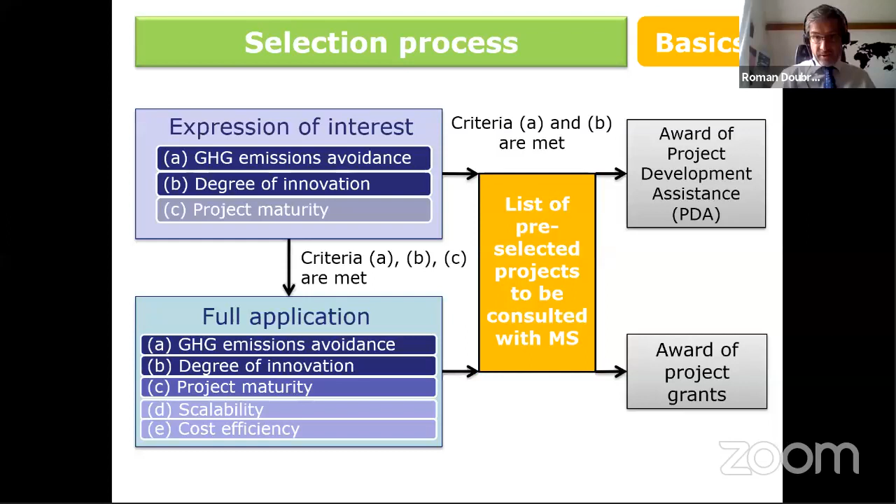Another element that I think is important, and makes this different from other programs, is that we were really thinking about how to simplify the way the funds will be paid out, so that we are as close as possible to the normal business of companies and their normal investment decisions.

The Innovation Fund support will be paid along the project milestones, as we call them. We have two milestones that are obligatory: financial close and entry into operation. But project promoters will be able to suggest additional milestones as they go along with their own project, and the funds will be disbursed once these milestones are met. So these will be lump sum payments.

We will not be checking, like in other programs, the full costs. What is important for the Innovation Fund is that the milestones proposed by the project are met and the project progresses. 40% of our support is not related to the achieved greenhouse gas emissions - this is also part of the risk that the Innovation Fund takes on its shoulders and puts on the table.

The first 40% of funding can be disbursed upon or before financial close, to enable the development stages of the project. The remaining 60% of the support has to be related to the avoided greenhouse gas emissions, but this will be paid out along the project's evolution during construction and once the project enters into operation. Thank you.

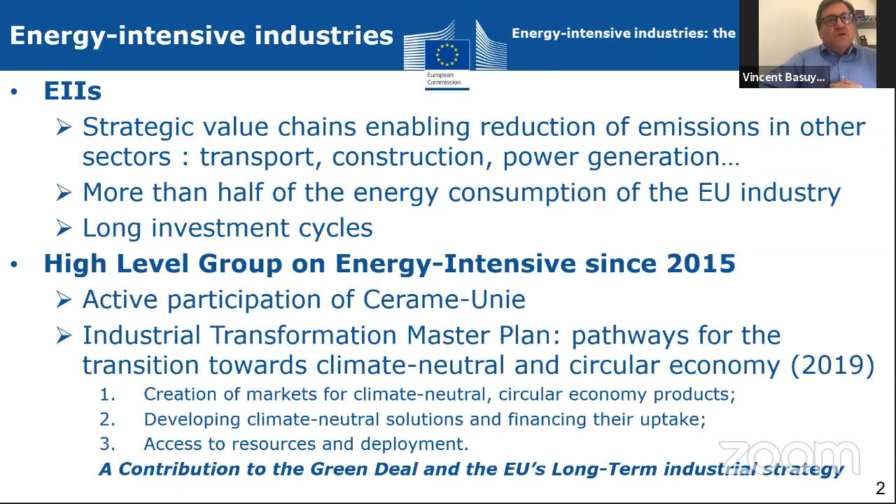I won't go into detail on this master plan, but I'd like to present some key recommendations from the High-Level Group found in it. First, the creation of markets, as mentioned, requires a life cycle approach and proper measurement of the greenhouse gas footprint of products and materials. We have also enhanced the use of public procurement to select sustainable products and services.

In terms of innovation, my colleague presented the Innovation Fund, so it's important by 2025-2030 to develop large-scale pilots to showcase clean technologies for energy-intensive industries, and to align eligibility criteria between different funds at EU and national level for interoperability of funding mechanisms. Investments are key in this transformation, so it's important to build a pipeline of technology projects to be funded by both public funds and the private sector, facilitating access to private capital at affordable cost, including through de-risking instruments.

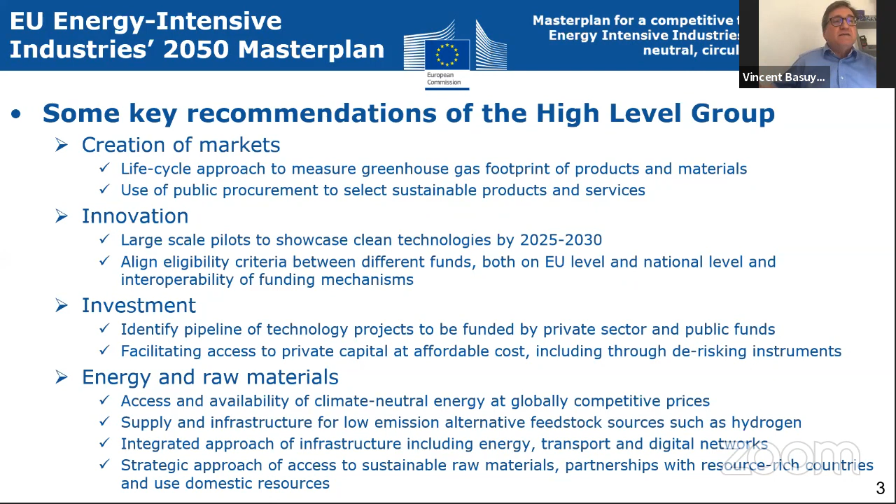I'll also mention energy and raw materials, which are essential for energy-intensive industries. We need to guarantee access and availability of climate neutral energy at globally competitive prices. We see solutions such as electrification or the deployment of hydrogen, but these are only possible if supplied at a competitive price. That means we need to develop infrastructure for low-emission alternative feedstock sources such as hydrogen. An integrated approach to infrastructure, including energy, transport, and digital networks, will be part of the solution. Regarding raw materials, as mentioned by the previous MEP, we need a strategic approach to accessing sustainable raw materials through partnerships with resource-rich countries and better use of domestic resources.

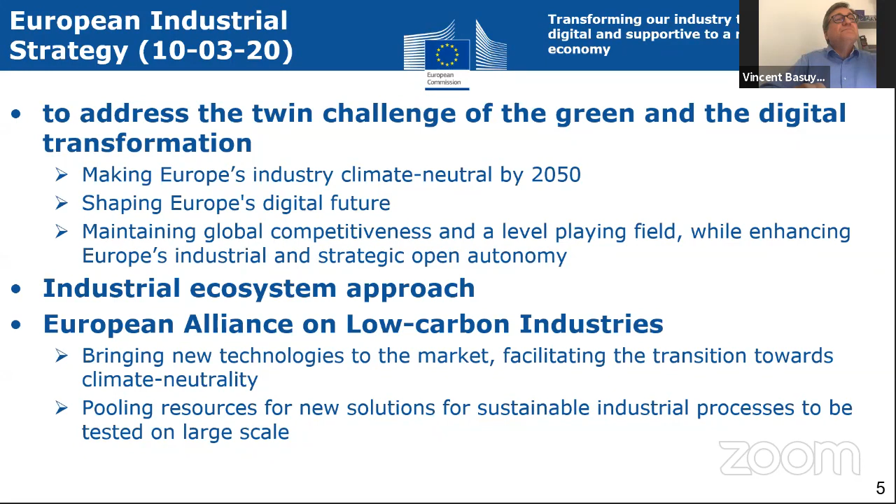Everything was fine, but as all of us have experienced, last March we experienced this coronavirus crisis, and that means we have to adjust the policy tools. On the 27th of May, the Commission proposed a recovery plan based on different tools in order to strengthen and restart the industry and the economy, and accelerate the green and digital transformation to strengthen the resilience of our industries. It's based on different tools—I won't go into detail, most of you know them, and it's still in development in terms of implementation. I'll just mention the very important role of relevant national authorities in being able to benefit from the funding available under the Recovery and Resilience Facility for the twin green and digital transition.

So I will conclude with these recommendations: the Commission's strategic policy framework—the European Green Deal, the digital and March industry package, and the recovery plan—are now the common policy tools for this strategic framework. The question is the implementation of these initiatives, which requires partnership. For that, we need joint commitment and cooperation between all EU institutions, industries, member states, and also European regions. Thank you.

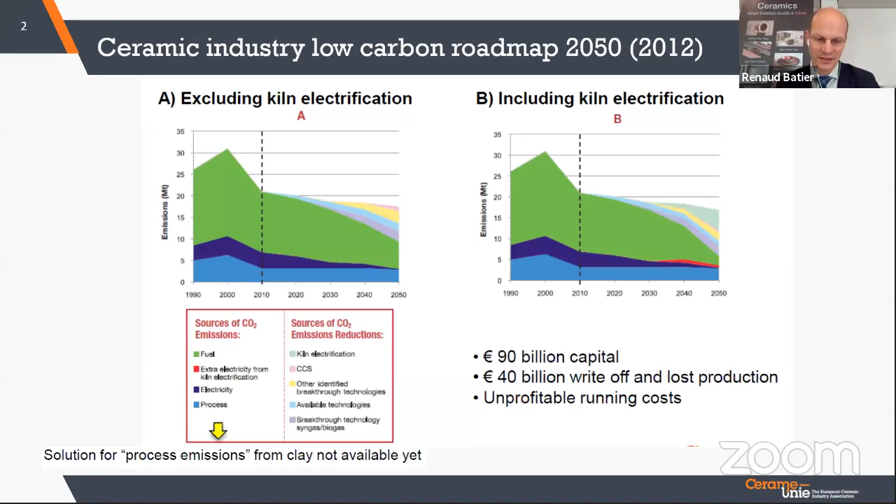So now we are moving into a different context where the EU has adopted a new goal, which is to reach carbon neutrality in 2050. We are updating our roadmap. We are in this process.

The roadmap in 2012 identified technologies to improve raw materials, so reducing emissions at the phase of raw materials production, energy efficiency, process optimization, kiln designs, and so on. It included cogeneration as well, which for us is a very adapted or very fitted technology because it works very well for us to produce both electricity and heat.

The problem is that if we use cogeneration, then we use a bit more natural gas, and ETS is making us pay more carbon for this.

In the context of this new EU objective, what we are trying to do is look at the technologies which we did not take into account at the time. So mainly substitution of natural gas with...

Renewable sources, for example. We think that the future will really be into hybrid technologies, mixing natural gas with, of course, hydrogen to some extent, and this is being investigated in detail. Also mixing natural gas and microwave, and using industrial heat pumps. So all this is being investigated, as we will see.

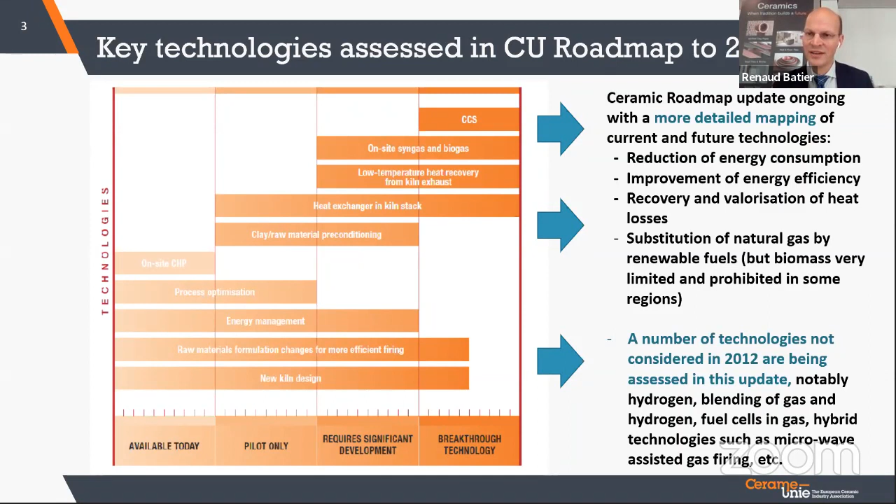I think the research and innovation projects that we will see later really show to what extent the new technologies that I already mentioned are what we want to investigate further: more efficient energy recovery with industrial heat pumps, hybridizing systems, considering cogeneration, and having the right incentives for cogeneration.

So these different technologies will be adapted to different contexts at national level. As I said, we have plenty of different subsectors. We are very heterogeneous, so we need absolutely all solutions. This is really the spirit in which we are engaged.

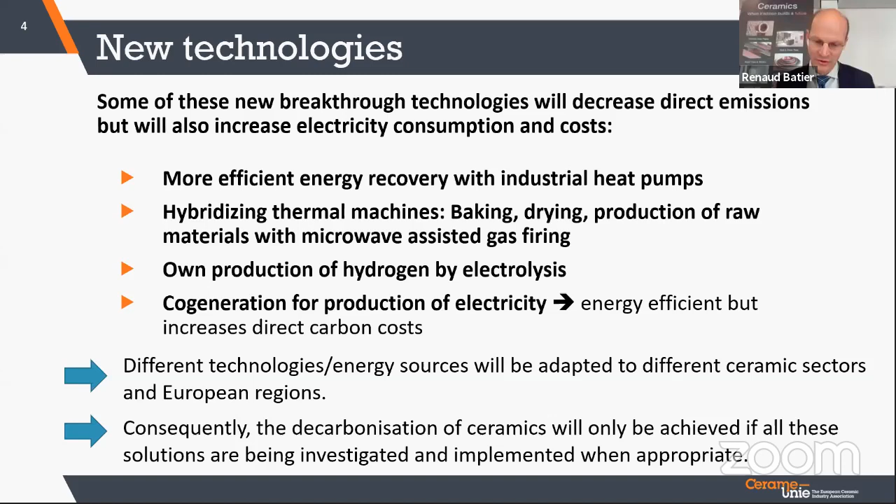So moving to the following slide, I hope I'm in time.

Concerning the other part, we need to be engaged, our members need to be engaged, we need the support of the ETS Innovation Fund and Horizon Europe, public-private partnerships such as SPIRE, which will then become Processes4Planet, where in the past we had 10% of the projects involving one ceramic partner, so it has worked for us.

But we also need recognition of the exposure of ceramics to these indirect costs, so direct and indirect carbon costs. Here we're speaking more specifically about the inclusion of ceramic tiles in the list of sectors eligible for compensation costs under the ETS state aid guidelines, because we are recognized as gas intensive, but we think EU regulators do not sufficiently take into account that we are going to become more electro-intensive. We need all these solutions, we need to invest so much in them, and we need the incentives.

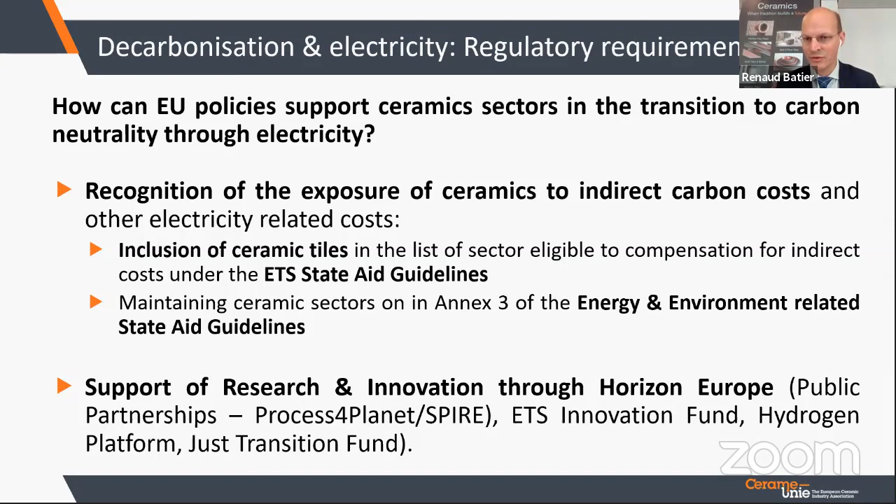And then after the ETS state aid guideline, the review of the energy and environment state aid guidelines will come. All our sectors are currently on Annex 3, the list of eligible sectors, and we need to stay on this list if regulators want us to invest in these technologies.

The fundamental problem we've had in this context is that legislations like the ETS are really made for large industries, for large emitters. We are a large industry in turnover, and we are very large in jobs, 200,000 direct jobs, but with all our SMEs, it's very difficult to fit the criteria that are often defined. The criteria to identify who is exposed to direct and indirect carbon leakage, the risk of relocation, are really made for large industries, not like us.

You can see here we have made an infographic. On the left-hand side is the current method, simplified, but this is the idea: we are currently assessing intensity by dividing CO2 by profits plus labor cost. This means that the more jobs you have for the same turnover, the less carbon intensive you seem to be.

For us, it's completely wrong to compare CO2 by the number of jobs and the number of people working in your industry. We think the right method would rather be, as you can see on the right-hand side, comparing CO2 with profits, and that really shows you to what extent you can pass through the carbon cost or not. It has nothing to do with labor cost.

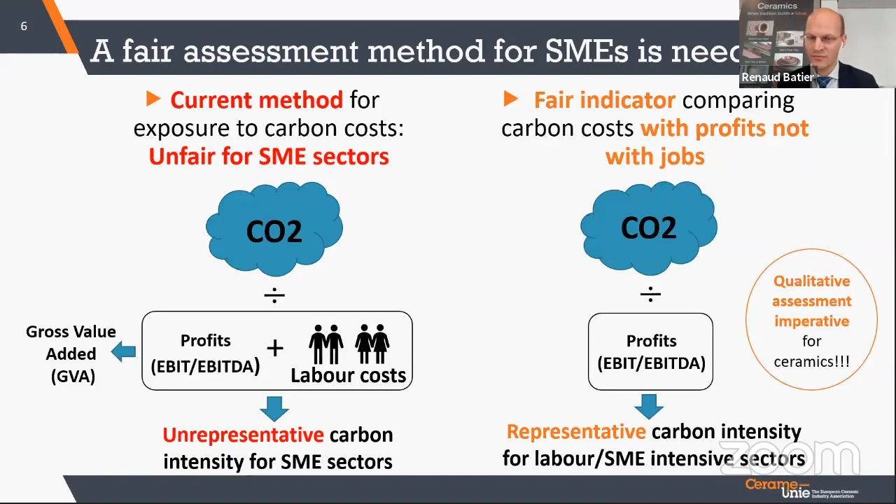And I will finish with one last slide, made by our consultants PricewaterhouseCoopers for the reply to the consultation on the ETS state aid guidelines. It shows that for ceramic tiles, the percentage of labor cost would be even higher for bricks and roof tiles.

But it's showing that for ceramic tiles, within the gross value added, which includes both labor cost and profits, our labor costs represent 15% of this gross value added.

For other sectors it's less, and we compete particularly with refined petroleum, because with refined petroleum you can make carpet, vinyl tiles, plastic tiles, and linoleum. So we compete directly with these, and the methodology applies completely differently to them, because their labor costs represent only 2% of their GVA.

So I finished on this, and I'm happy to answer any question at the end. Thank you. Thank you so much, Renaud.

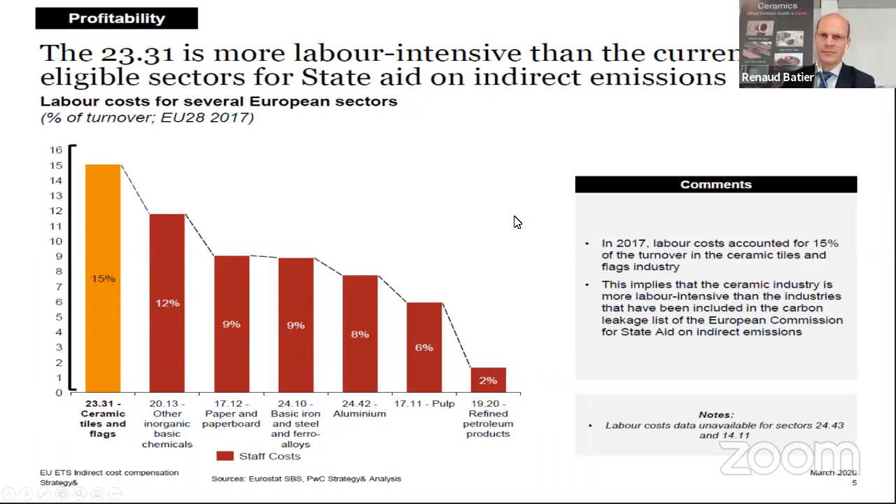If I look back over the speakers we've had this morning, we're hearing a lot of challenges: that the Just Transition Fund and the Green Deal are not enough, maybe billions of euros not enough, and that it's challenging for a sector with many SMEs to make these transitions, especially in the aftermath of the Corona lockdown. We'll come to all of this later in the Q&A.

I just wanted to sum up a little bit. What I did hear though was that there is a political will and a lot of enthusiasm to make these changes. So that's really positive.

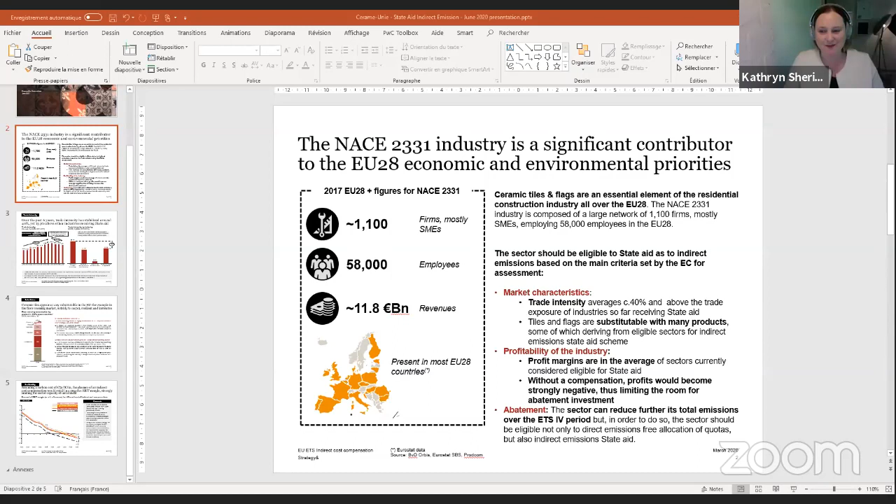And it leads us nicely to our next speaker, Vladislava Iovkova. She's a director at PricewaterhouseCoopers, PwC Advisory, and she's going to talk about the economic aspects of decarbonization. We've heard about many challenges. We're going to hear some solutions in a moment, but first let's look at the economic aspects. Over to you, Vladislava. Thank you.

Good morning everyone, I'm Vladislava from PwC, and I'm pleased to be with you here today. We've been working with Cerame-Unie for some years now, assessing the impact of EU ETS. And today I will speak to you about indirect emissions and state aid compensation.

That's a topic that was already introduced in the previous presentation. Today I'll give you some key facts, some highlights on the economics. Namely, I'll explain why the roadmap that was nicely presented by Renaud is very important for this industry.

A lot of things are going on. However, the economics of the sector also has to be considered, with a key question introduced throughout this session, throughout the morning: how to make it possible and how to ensure that there is indeed an even playing field for the sector.

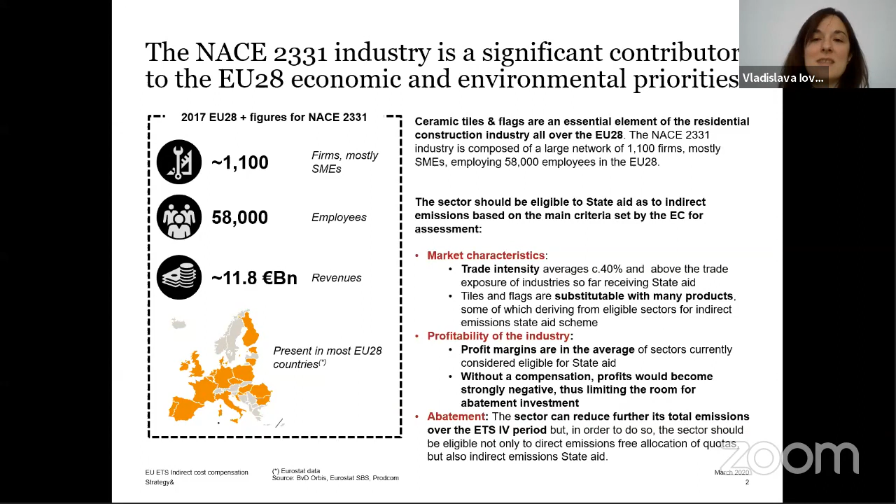Let me start with some key facts about the ceramic tiles and flags industry. This is an industry composed mostly of small and medium enterprises across Europe, employing over 58,000 employees based on Eurostat data. This industry is present in most European countries, really hugely widespread across Europe.

As you might know, the eligibility for the state aid scheme to compensate for indirect emissions is based on a few criteria, which consider not only the ability to invest and curb emissions, but also some market characteristics, as well as the profitability of the industry. Today I will develop mainly on these two points, to give you the other side of the criteria, the other side of the challenges the sector is facing today.

Our first point, already introduced at the beginning, is trade. As you know, ceramic tiles are highly traded worldwide. Today, the sector averages a very high trade intensity. So what is trade intensity?

It is the ratio between the import-exports of the industry with respect to the extra-European countries, and also the production plus imports. So it's a measure of the trade dynamics, and it's a main criteria the Commission is considering to assess whether an industry is eligible for state aid compensation.

So in the context of this industry, trade intensity is quite high. It's been historically high. And today we see that comparable industries who, as of today, have been receiving the state aid, somehow do not have the same trade intensity as ceramic tiles.

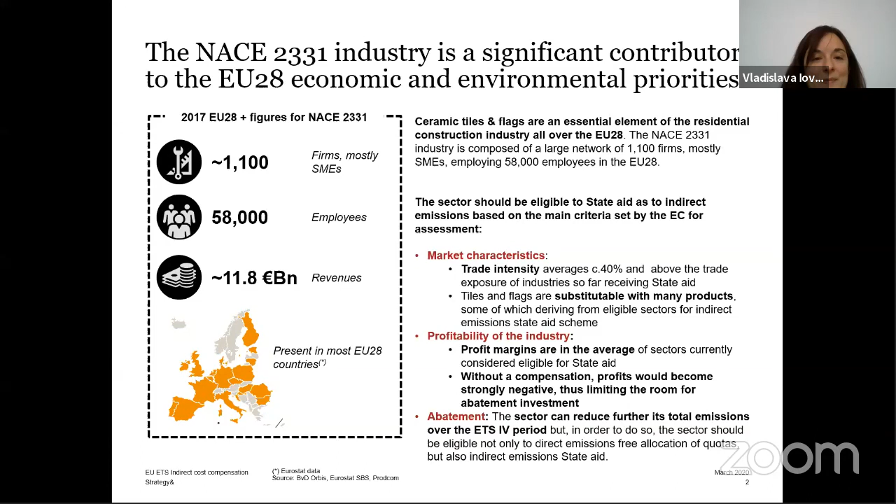So for the first point, I'll show you briefly the figures of trade intensity that I just introduced. Trade intensity for this industry has historically reached ratios above 30 and 40%, which is very, very high, also with respect to the criteria the Commission is studying.

And over the last year, if this ratio managed to stabilize, this can be explained by anti-dumping duties which were imposed, and also what is being considered today for Saudi Arabia, for instance.

And if we consider other sectors which, as of today, are granted or receive state aid compensation for indirect emissions, we can see that ceramic tiles and flags, over the historical period considered for assessment, has higher trade intensity. This means the sector is already more exposed to these competition issues with third countries.

Regarding the internal market, as I introduced, ceramic tiles appear to be quite easy to substitute even internally. Here we propose an example regarding floor covering, one of the main markets for ceramic tiles, across a set of countries which account for more than 60% of the total market. And we show that in this major segment, ceramic tiles account for approximately one third of the market.

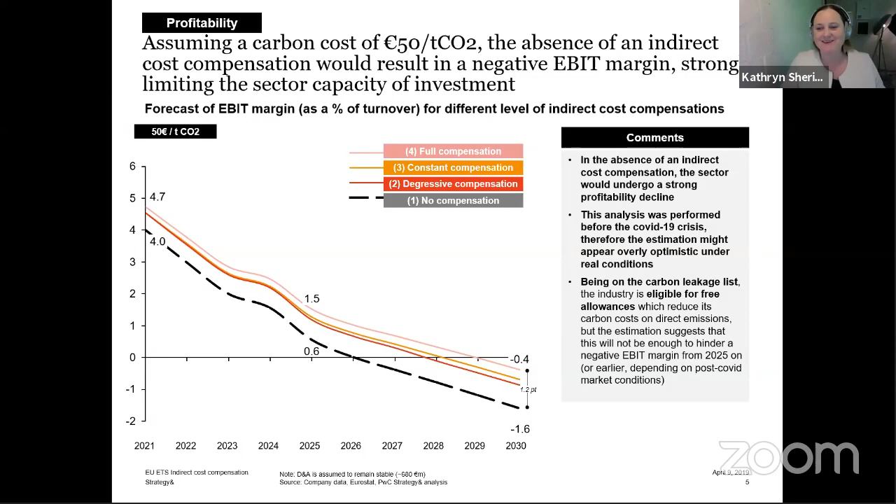As we switch to our next speaker, it does reflect something we see across the European Union: industry sectors where there are lots of SMEs and lots of jobs at stake, but we still need to make the change to a less carbon intensive industry. So it's a very important challenge, and we're lucky to have such informed speakers with us today.

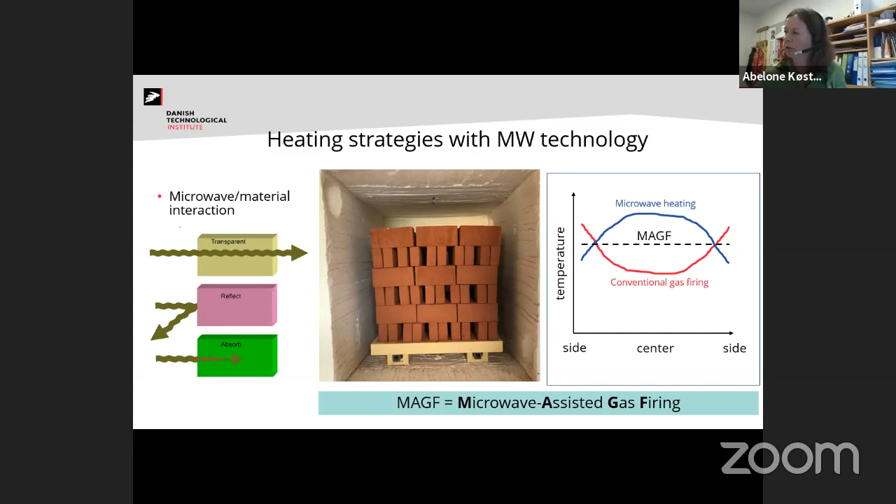In a recent project we built a pilot microwave-assisted gas firing kiln, as you see now. Its capacity is around 200 facade bricks, and it can fire up to 1300 degrees Celsius. It has 4 gas burners, so it can heat with gas alone, and it has 4 microwave ports and 2 microwave generators.

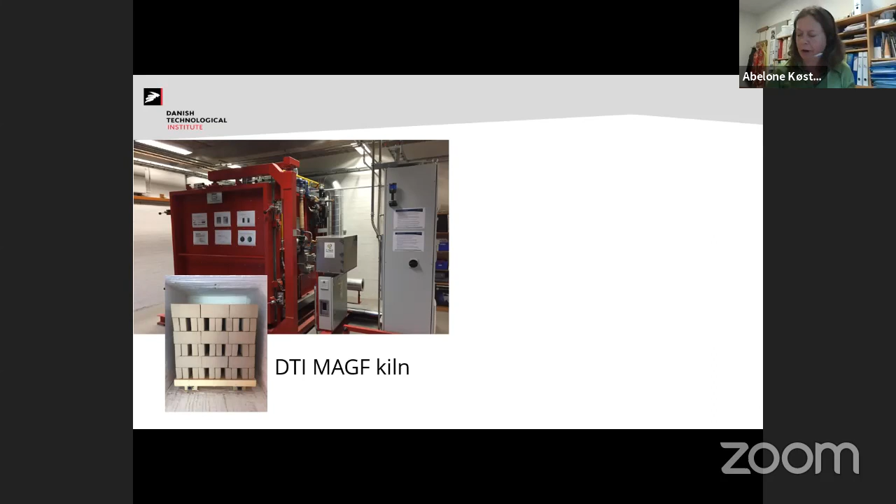We did a lot of firing with this kiln, trying conventional heating with gas and trying to heat as well as we could with the dense stack - stacked the same way as in the brickworks. Normally it would take us 24 hours to heat to the top temperature, and we would soak for 6 hours to get optimum quality.

But when we applied the microwaves, we could heat in nearly half the time, 12 hours, and we only needed a soaking time of 4 hours. So we could heat much faster and still obtain good quality bricks, both aesthetically and technically.

As far as energy consumption, we could see that we could almost halve the use of fossil fuel, because we transformed into electrical energy using the microwaves, and the total energy savings were 20% when we compared optimum gas firing with optimum microwave-assisted gas firing. This kind of savings we could not obtain in a standard tunnel kiln, because the energy saving is mainly due to the shorter firing time, giving less energy loss from the kiln itself. But still, we were able to transfer from gas to electrical energy.

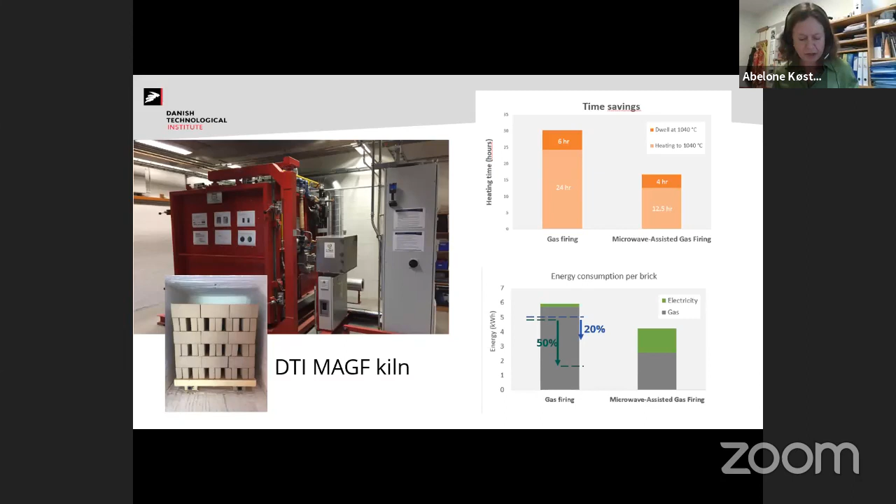So what were the benefits from this project?

We used at least 44% electric energy by applying microwaves. So this is the potential. We shortened the heating time by up to 50%. This would give you less heat loss from the kiln itself, and it would also allow higher productivity, a higher throughput from a kiln, or a shorter tunnel kiln if you like. But the shortcoming is, of course, we did not have an optimum kiln design.

We did this more or less based on experience. Instalat built a very good gas kiln, and our project partner, C-Tech Innovation from the UK, did the design of the microwave appliances. So we had a good design, but based on what we learned after literally hundreds of firings, we know now that we would have done something differently.

The main reason we were not able to supply more than nearly 50% microwave energy was because of the kiln design, which was based on controlling the heat with gas firing, so we could not go higher, simply because we could not control the kiln. So a large problem here, other than the use of a lot of expensive electricity, is scaling up the kiln design.

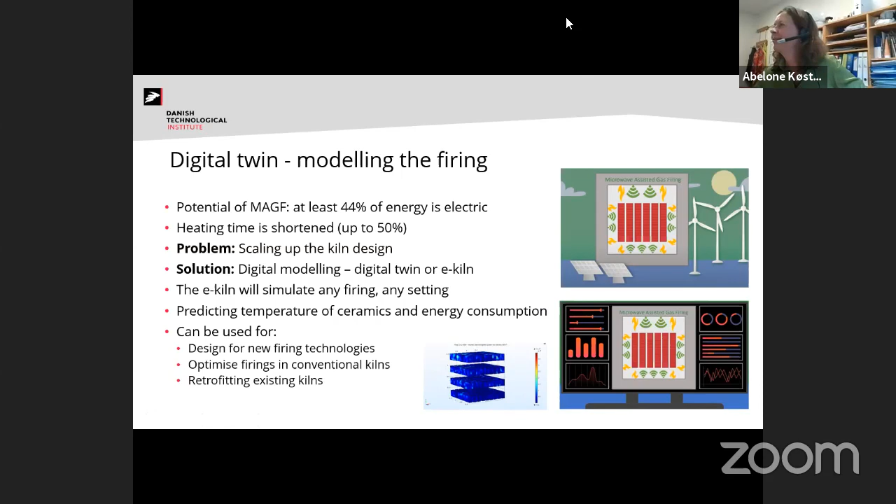Okay, thank you so much. That's super interesting. When you think of microwaves, you're not necessarily thinking of ceramic kilns. So that's super interesting. Thank you.

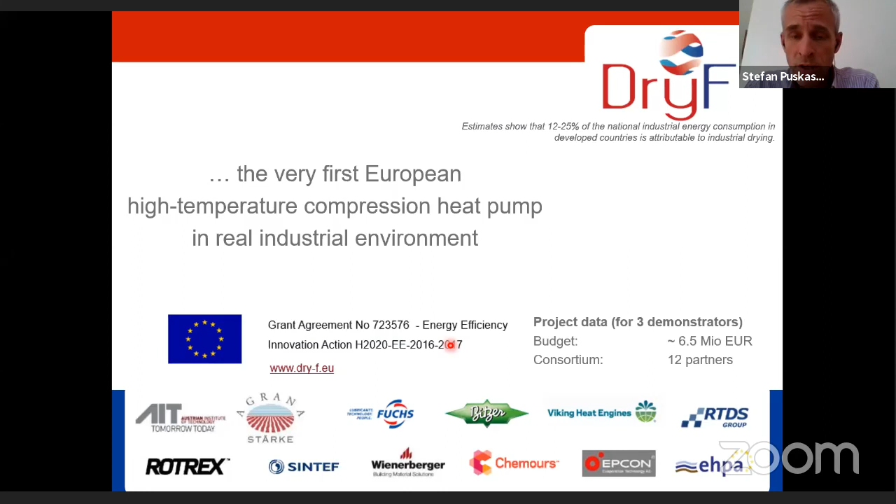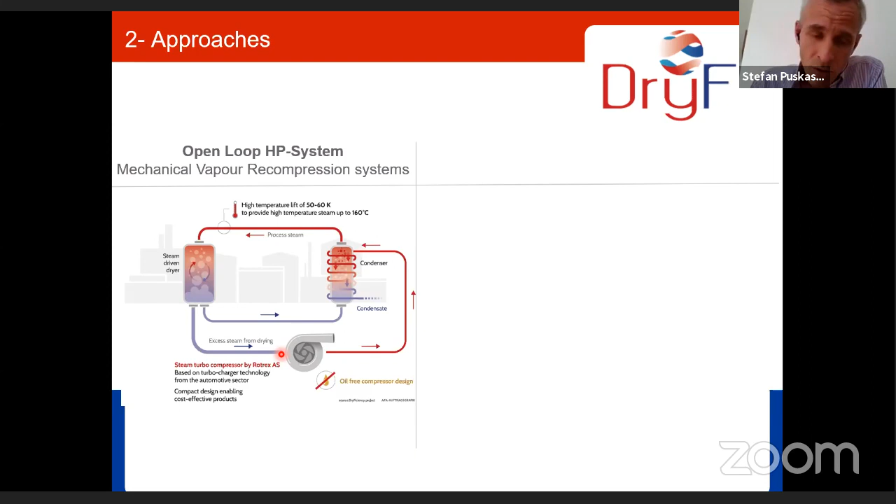We developed in this project 2 kinds of heat pump drying systems. One is an open loop system where the evaporated water is used as a refrigerant, becomes compressed with a turbocharger to condensate the evaporated water and recover the latent energy. This technology could also fit very well for brick drying, but anyhow, we are now in the second part of the project, the closed loop drying development.

Here it is about the compression heat pump that provides temperatures up to 160 degrees Celsius. The innovative things in this heat pump are the refrigerant coming from Chemours and the compressors. We have one screw compressor from Bitzer and piston compressors from Viking Heat Engines.

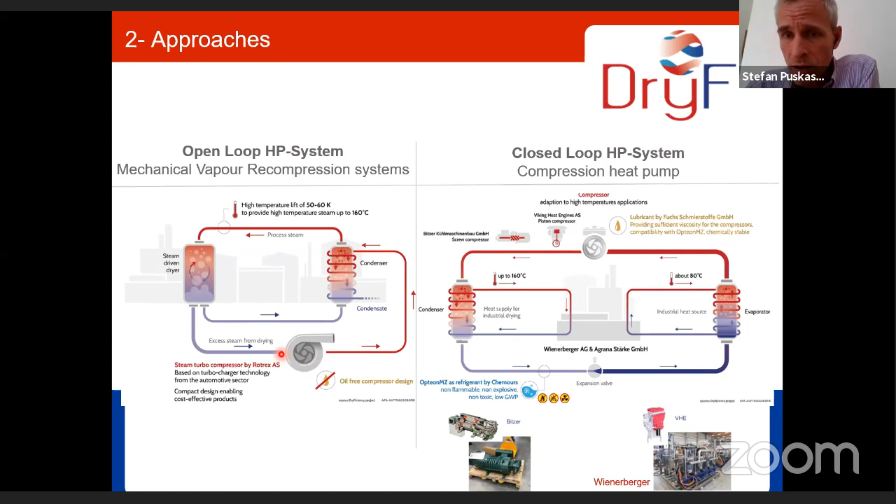The second application you find in the Wienerberger plant. The lubricant is also an issue in high temperature compression heat pumps, so we are working in a closed loop system and not in an open loop system.

The machine looks more like you see below. It has a heating capacity of design of 400 kilowatts. We have reached 250 kilowatts on the sink side, and maximum water temperature of 160 degrees Celsius. The electricity consumption is between 70 to 85 kilowatts.

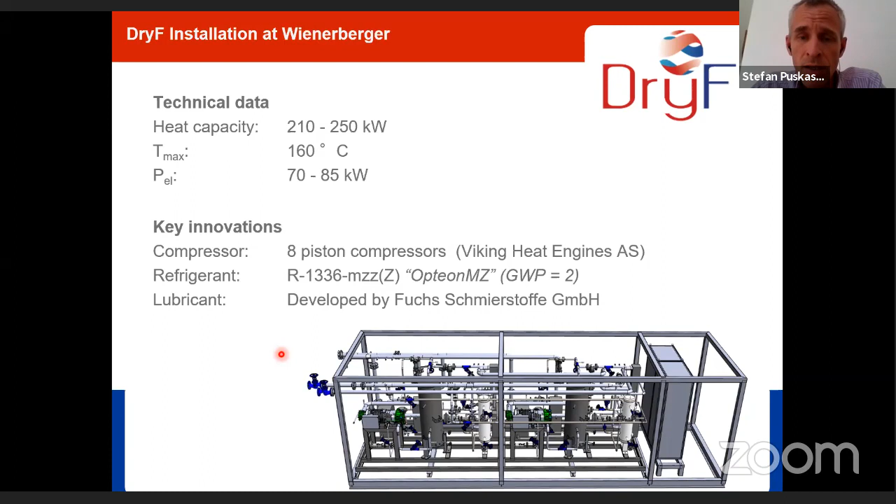I mentioned the piston compressors coming from Viking Heat Engines. The refrigerant is newly developed, it comes from Chemours and has a global warming potential of only 2. The lubricant is developed by Fuchs Schmierstoffe.

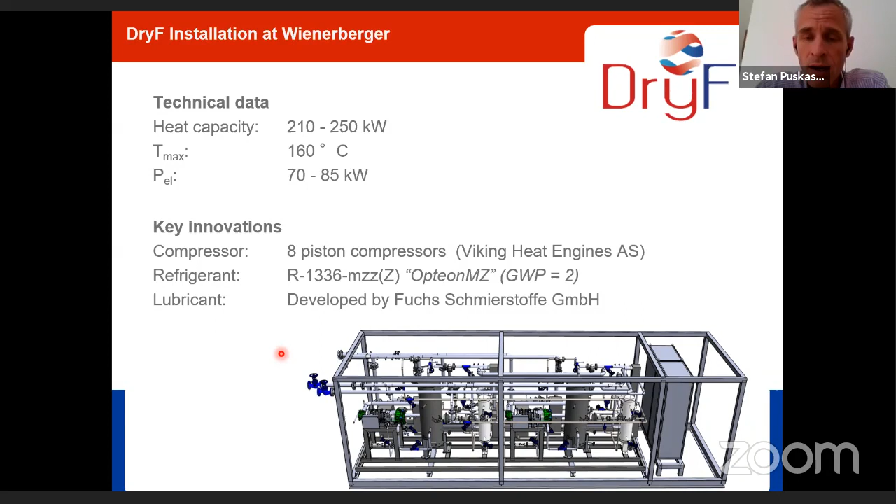Our role is the demonstration in an industrial environment of this new technology. All this is installed in Upper Austria in our so-called demo plant. This is a quite small hollow block production site where we try out all the new technologies, best available technologies, to figure out how to improve and reduce the specific energy consumption of existing production sites.

I think everybody's familiar with the production of bricks. There's the tunnel dryer and the kiln, and the excess heat from the cooling zone of the kiln is used to heat the dryer.

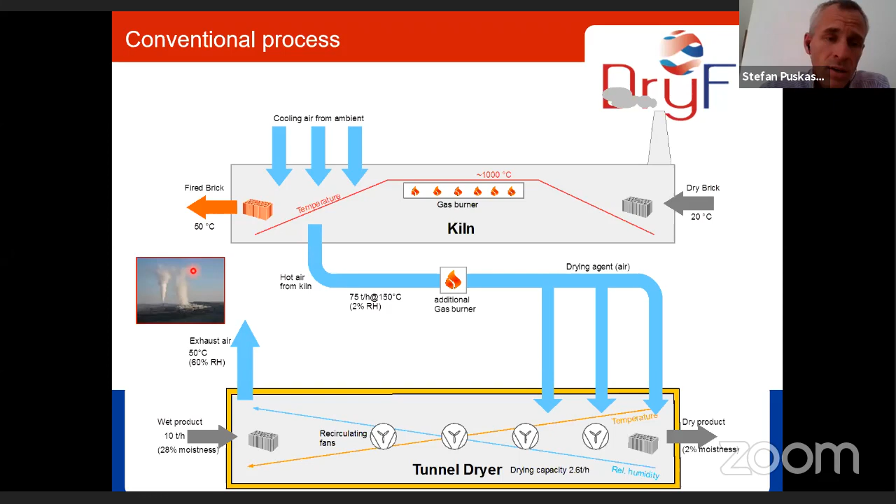Now have a look at the temperature profile and the relative humidity profile through the dryer, because in the next step it will look slightly different. The goal is to recover energy from the exhaust air of the dryer, and we do it like this.

We produce water of 90 degrees Celsius, and with this 90 degrees Celsius water we heat the tunnel dryer with internal heat exchangers. They were used, not centuries, but decades ago. It was normal that we had internal heat exchangers in dryers. Now we have to come back to this technology.

We take advantage of this 90 degrees Celsius water duct. We use it as a source of energy for the DryF system to demonstrate the reliability of this new system. We take out some energy from this 90 degrees and we lift it up to 160 degrees to provide energy.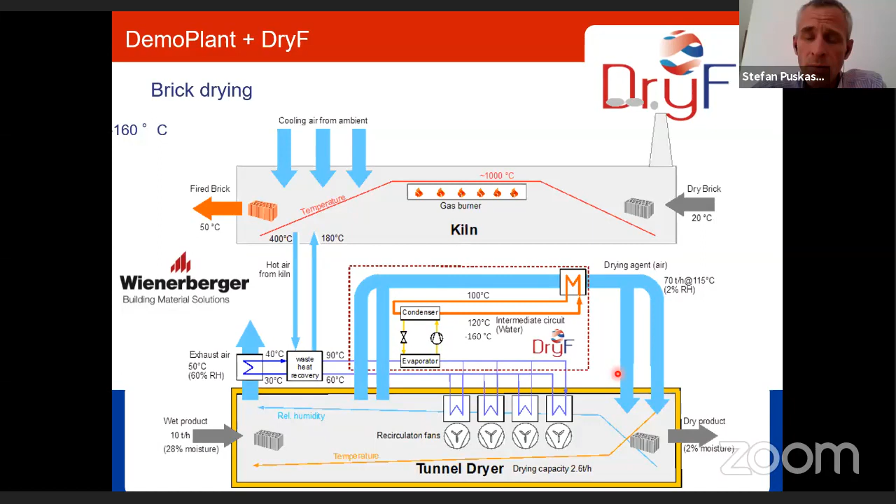To the return channel. Here you see from bird's eye view, our dryer has forward tracks and one return track, and a part of the return track is used as a final drying zone. We installed a recirculation duct with a fan and a heat exchanger, linked to the DryF heat pump, and we can provide quite high temperatures to this return channel.

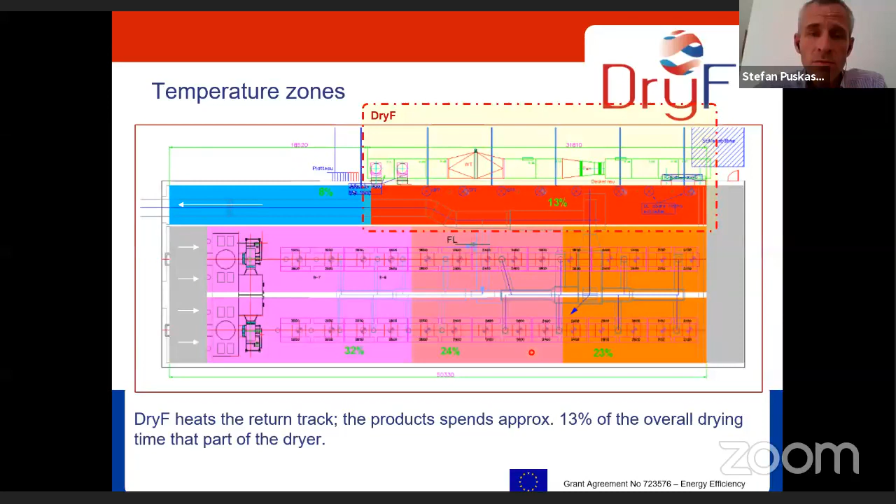DryF. This is the first stage, the absorption heat pump. It's a huge thing, and we have to get familiar with this technology. It's not that easy, but now I think we are quite professional with this.

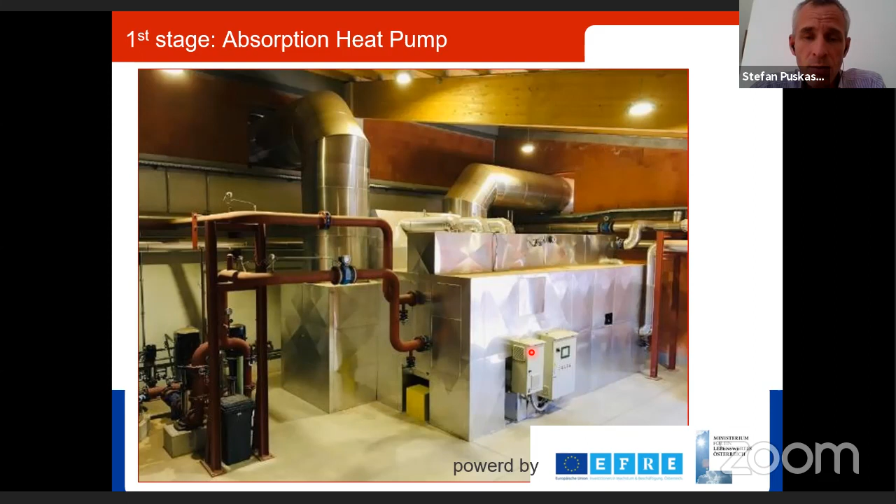The second stage is the DryF heat pump. It's situated in a container. You see here the pressurized secondary loop to provide the hot water to this heat exchanger, the recirculation duct with an axial fan, and behind there's the return track of the dryer.

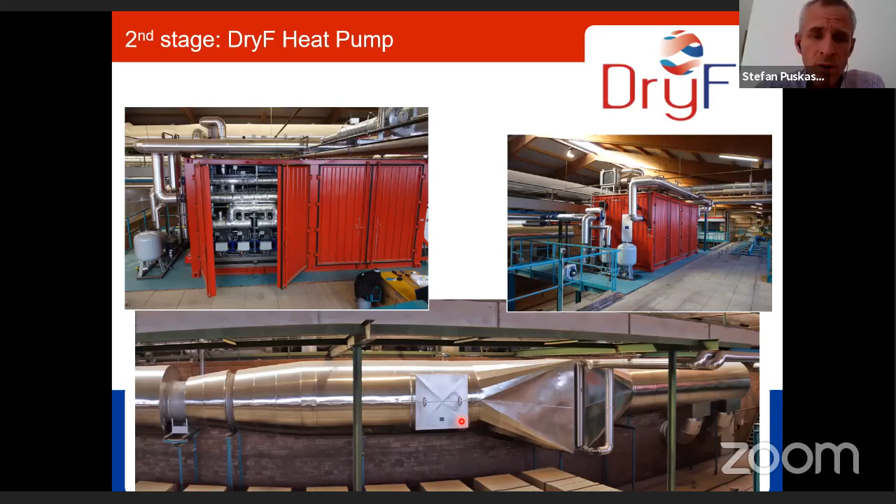The goal of DryF is the demonstration and the reliability of a new compression heat pump in our case. It's not, and this has to be pointed out, it's not to improve the energy efficiency of this plant. A heat pump or a high temperature heat pump makes only sense in the case that there's not another source of energy at the required temperature level available.

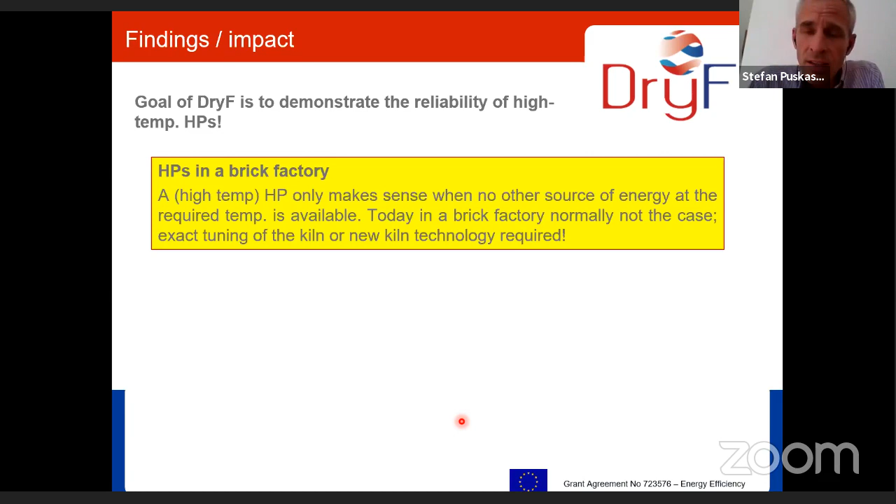In today's brick factories, normally this is not the case. Before, we have to operate the kilns to extremely reduce the excess energy in the cooling zone, or we have to develop new kilns. Then the heat pump is the method, I think, to operate a dryer.

Extra benefits in this kind of project are that we recover water. This is an issue in many regions. Think about 1.2 kilograms of water per kilowatt hour recovered energy. You have to talk to your authorities about what to do with the water, or you can use it in your factory.

Interesting is the reduction of the air mass flow through the dryer. It also helps reduce electricity consumption with less air in the dryer.

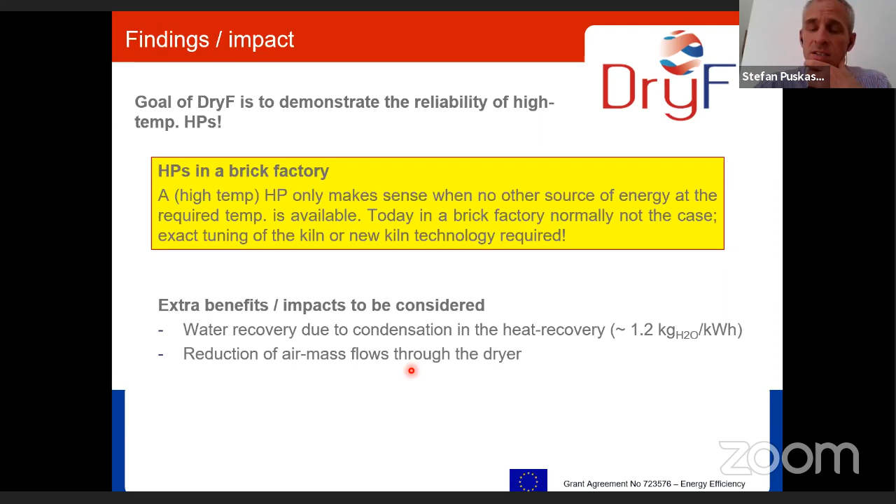This is my last slide. Following, we compare an ordinary gas-driven drying process with a heat pump-assisted drying process.

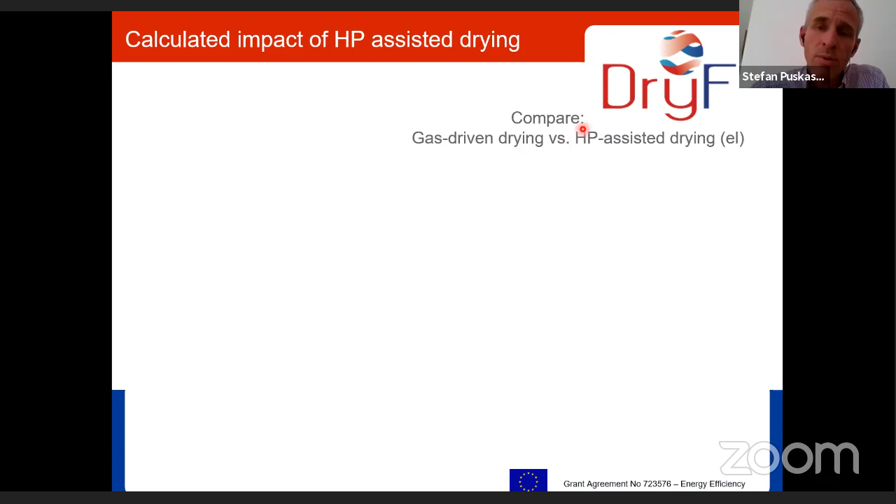We have to consider CO2 emission factors of natural gas. This varies: Austria talks about 270 grams, European Union 290 grams. We also have a primary energy factor to take into account for gas, and most importantly, the primary energy factor for electricity.

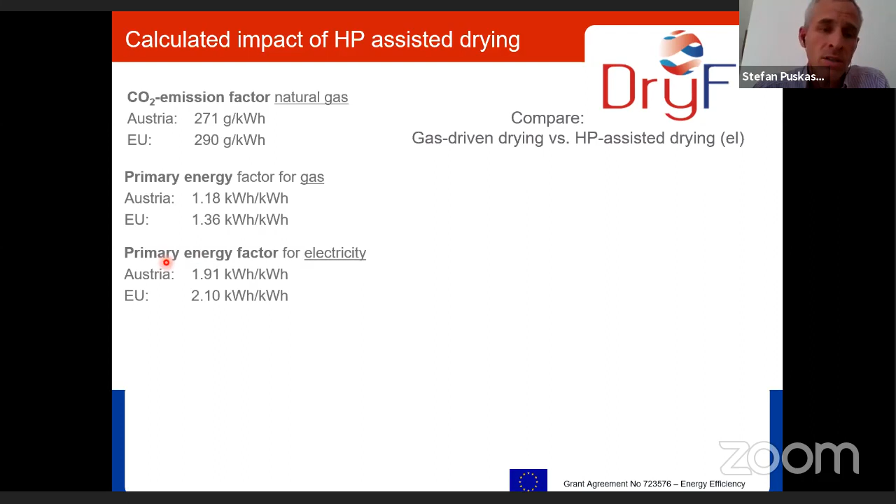Then we get a result that makes us quite happy. We see the CO2 emission reduction potential for drying above the sink temperature, the required temperature we need for the drying process.

In case we can operate at quite low temperatures, let's say 110 degrees, it is possible theoretically to reduce the specific CO2 emissions by 90% or 85%. And the higher the temperatures we need for our process, the less the reduction is.

The cake we are talking about in Europe is 320 to 800 terawatt hours of energy used to operate dryers, not just in the brick factory, but in general. Drying is a very energy-intensive and important process in industry. There's a huge saving potential, and dryer efficiency is a puzzle piece towards electrification of the brick industry.

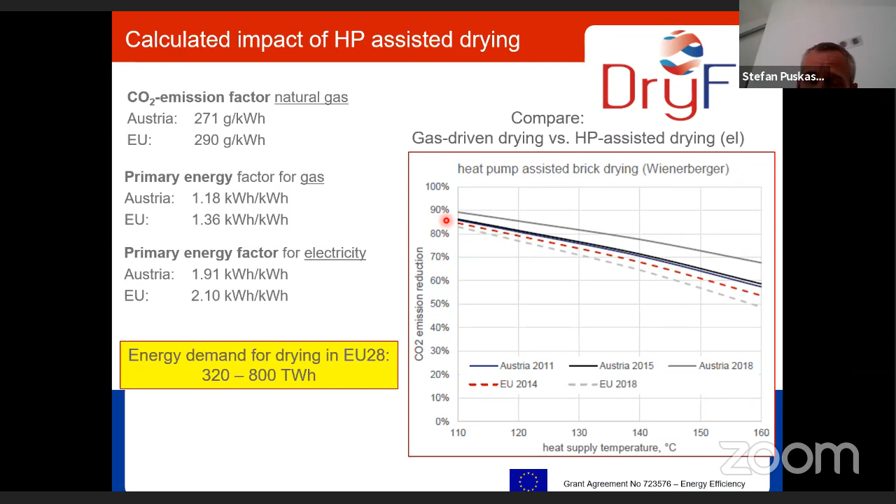Thank you so much, Stefan. Time? I don't know, almost. Thank you. Thank you so much.

That was a very interesting presentation of an EU Horizon 2020 project.

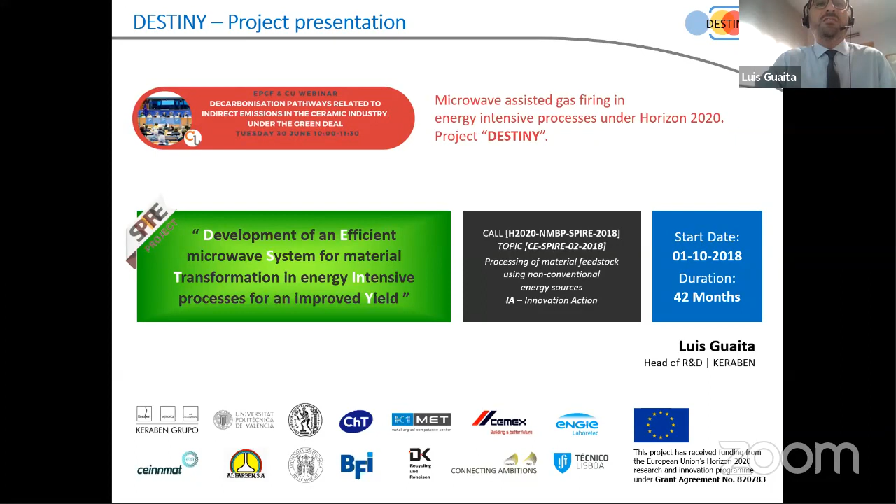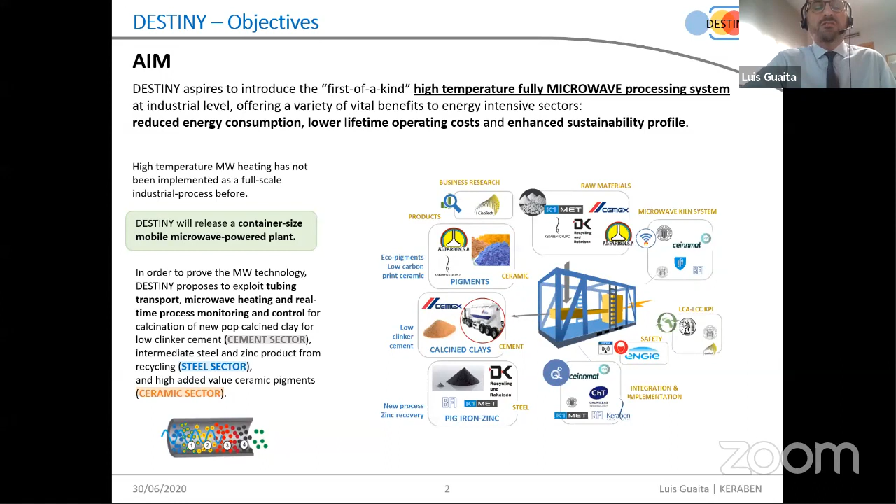The aim of the project is to develop a high-temperature microwave processing system. We want to release a container-size movable microwave power plant for processing feedstock material from three different sectors: the ceramic sector, the cement sector, and the steel sector.

If we observe the evolution of industry technologies over the years, energy has always played an important role. From the first industrial revolution with fossil fuels, we've seen how mass production requires efficiency improvement, how automation and efficiency brought alternative fuels, and how in the time of digitalization and Industry 4.0, industry is turning into electrification. Now the next step for a smart industry will require the correct use of electrical renewable sources.

Microwave technology is one of the promising technologies in this field because it allows ultra-fast processing of materials. It brings the possibility of modular production facilities, a flexible manufacturing system to react automatically in case of changes, whether predicted or unpredicted, and kilns can be stopped easily, something which is unthinkable now.

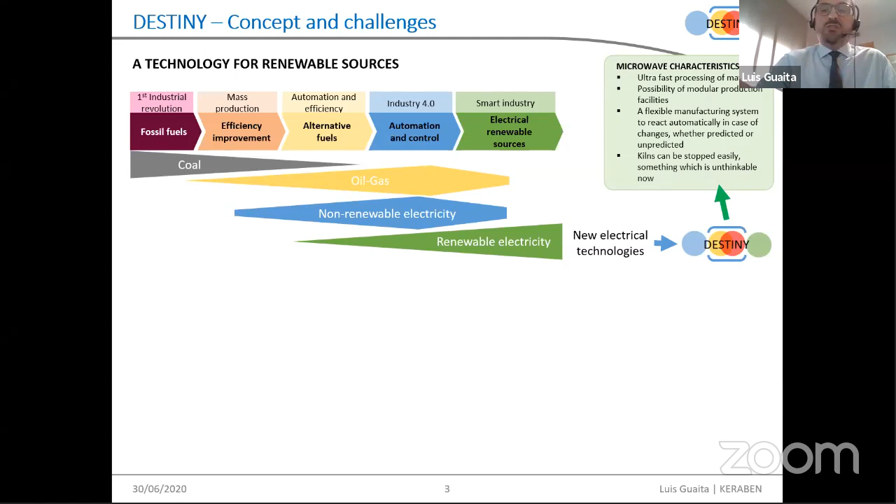If we think that a concept like the Destiny project presents could be the driver to move some parts of production from a centralized way of producing to a non-centralized way, this is one of the advantages of this technology.

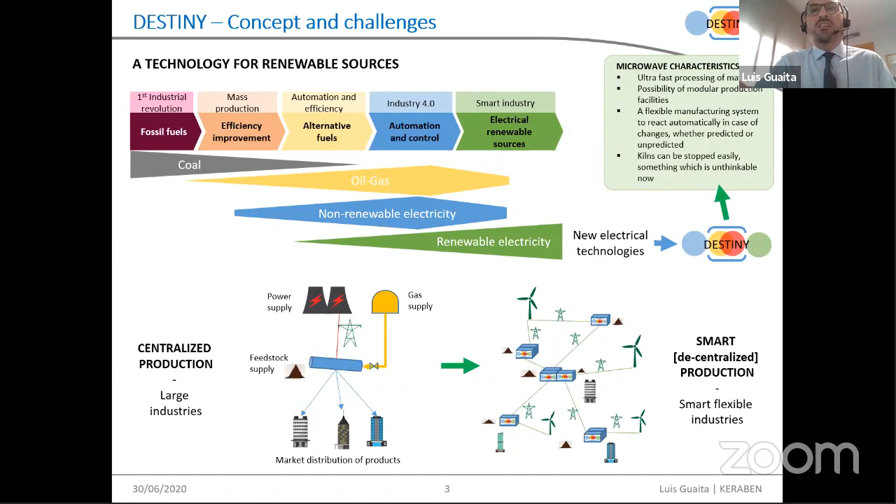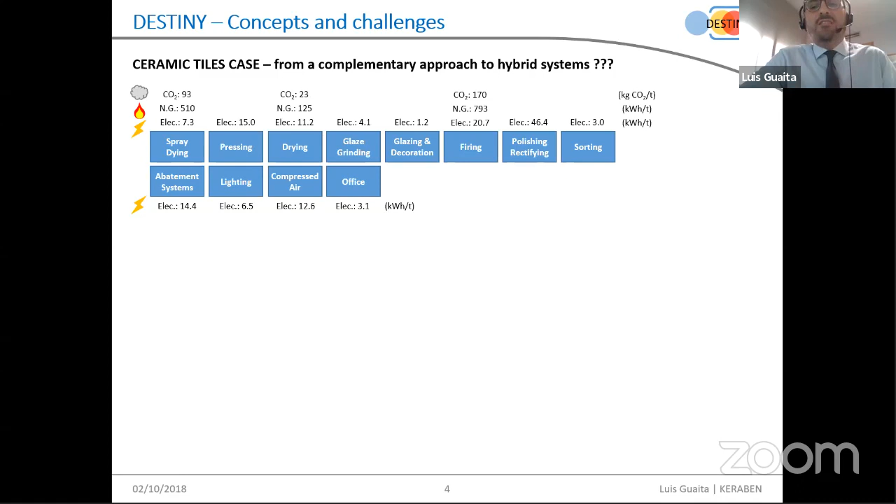Speaking about the ceramic tile industry, here you can see the different stages found in a ceramic plant. As you can see, the atomization, the spray drying, the drying and the firing are the most demanding sections in the plant in terms of energy consumption, and of course this reflects in terms of CO2 emissions.

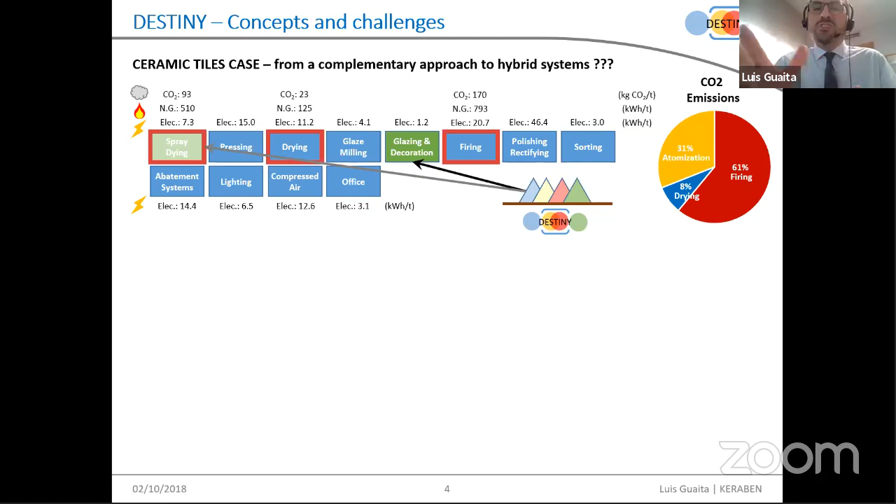The problem is that unfortunately microwave technology is not mature enough yet to cover some of these processes. So our approach is a complementary one: we are trying to cover the treatment of raw materials. We think hybrid systems can apply in the future in these demanding processes, but today microwave is not ready, for instance, for a tunnel firing.

In previous projects, we have proved the feasibility of microwave for the drying stage, and we have proved the feasibility of microwave, for instance, for the production of ceramic frits.

Speaking about advantages and disadvantages of the technology, we have learned that microwave heating is a very efficient technology. The efficiency is around 70% when similar processes using conventional heating systems, natural gas, have an efficiency around 20 or 35%. But today the main problem is the cost. Electricity is much more expensive. At the end of the day, the cost is compensated with the efficiency, and the operating costs are more or less equivalent, depending on the electricity cost of each country. But if the OPEX is similar, the investment, the CAPEX for a microwave system is still more expensive.

Another drawback is the scalability. It's not physically possible to get large microwave chambers, so there is no option for scaling up other than duplicating the kiln cells with arrays of kiln cells. So we think that this technology is interesting for products of high added value with small production batches, not for products of massive production. For instance, pigments are more appropriate than frits, or calcined clays for eco cements are more appropriate than clinker production. It's a matter of finding how to incentivize this technology, because thanks to the system flexibility, it's a good solution for absorbing the production of renewable energy.

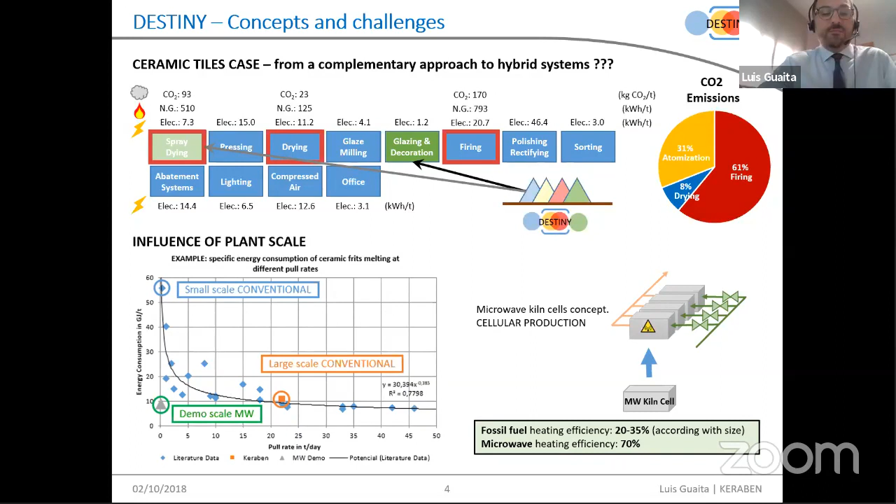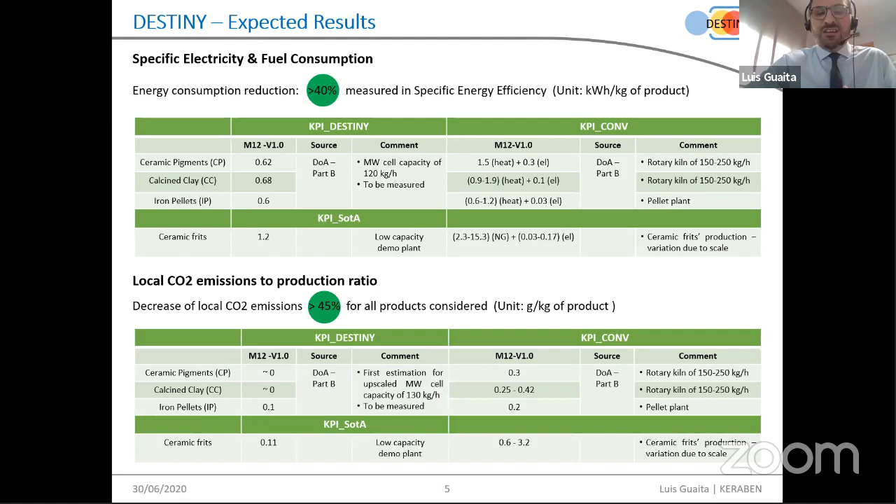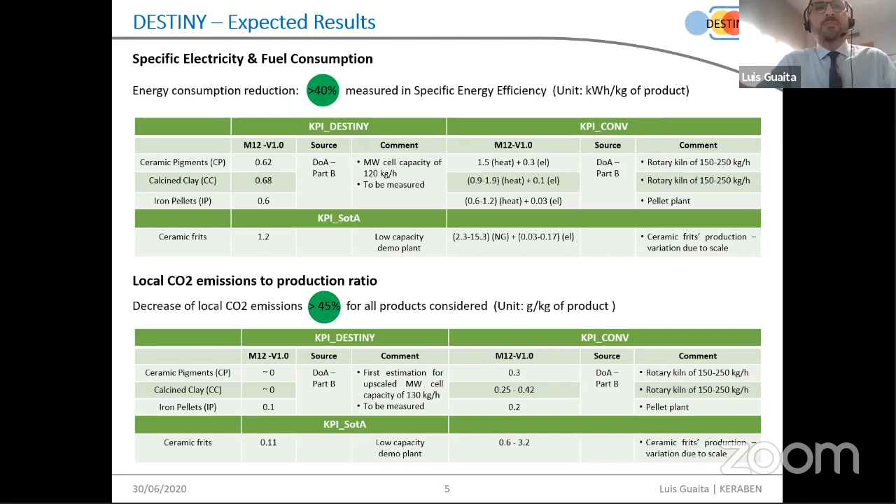Our project is still running. We don't have final results. We are in the second year of the project, but our expectation is to get savings in energy consumption around 40% and decrease CO2 emissions at least 45%. In any case, you can follow our progress through our website, DestinyH2020.eu. And that's all from my side.